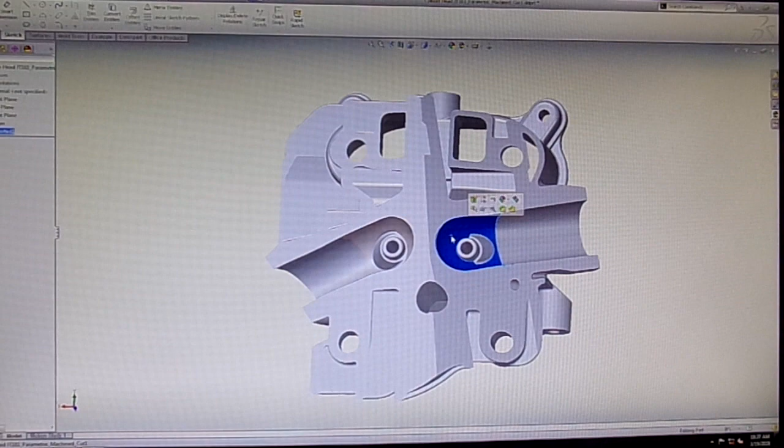So let me introduce you to some of the changes and benefits of the new PS1 head. First, I'd like to show you the new port design. If you notice in this area and in this area, the infamous bowls are gone. Many drivers and engine builders were filling those bowls with epoxy or metal impregnated epoxy to get better flow out of the head, meeting with quite a bit of success on the intake side, but not on the exhaust side because of the high temperatures just blowing that epoxy out. These are now cast in a way that the bowls are gone.

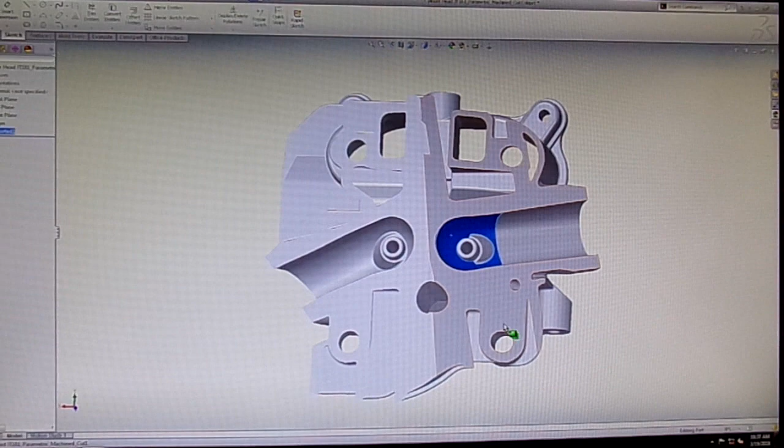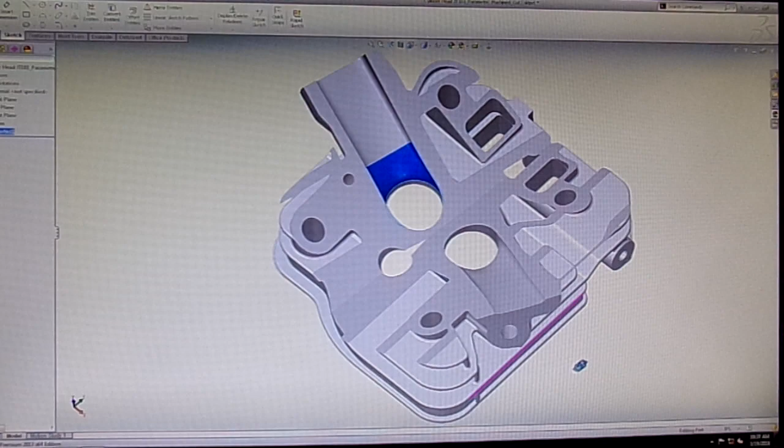This is a section view of the cylinder head. This matching section view shows the short side radius, and you can see we've changed that radius considerably in that area and in this area, for both the intake and the exhaust. What that's going to do is help the flow quite a bit. The radius has been increased to a point where the intake mixture will no longer separate from the wall as it turns that corner. The end result is at least a 30% increase in flow.

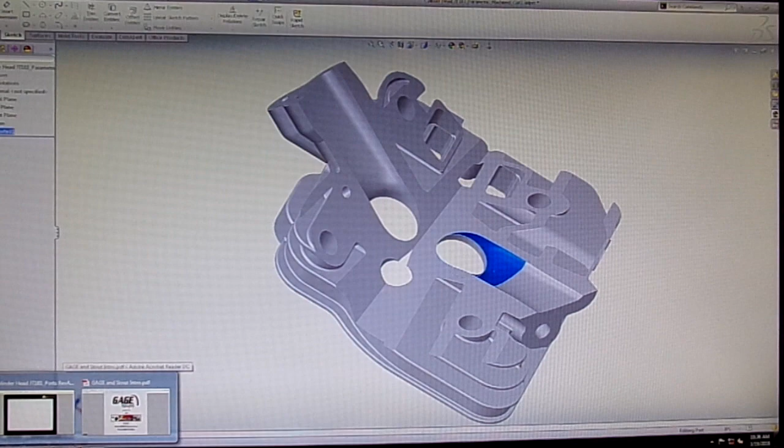I can also show you what those ports look like if you're just looking at the two ports. See the nice smooth radii around this bend, even around this short side here.

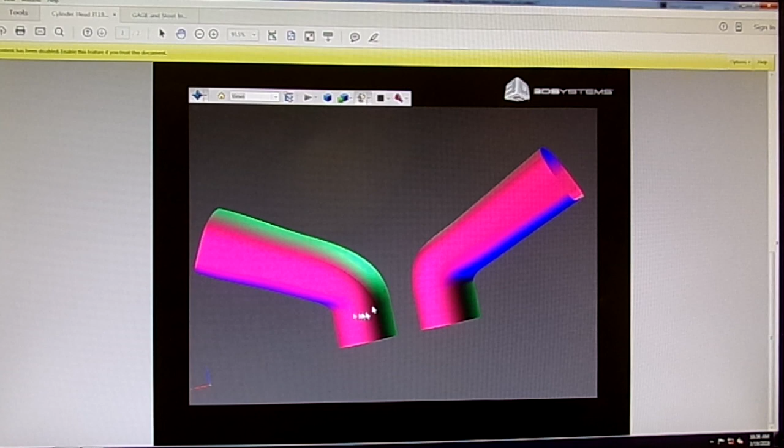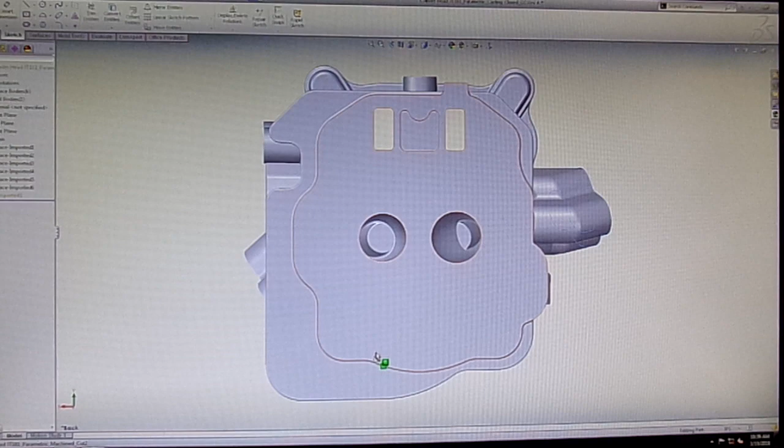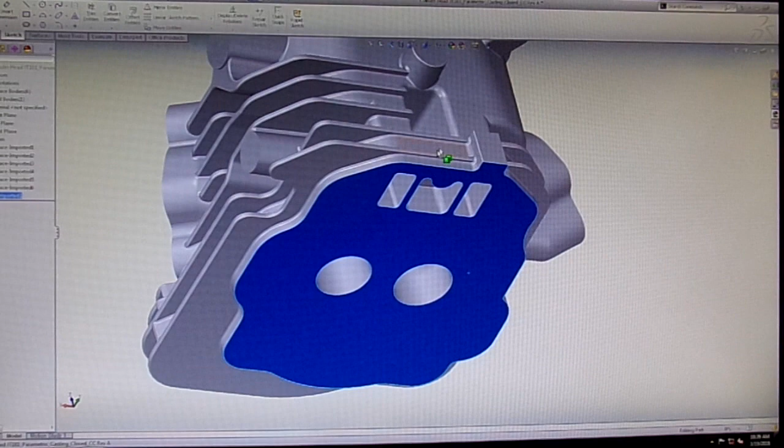Now, as we go into the casting model, there's a number of things we've done to change certain dimensions and supports. The first thing we've done is between the first and second fin, we've added material in this area, all these surfaces, we've actually made them match that surface. This surface has been copied and put between the first and second fin.

We've done that for a couple of reasons. One was to stiffen the head, because many drivers and engine builders were finding the heads warping once the gasket surface has been machined or decked, as some people put it, to get a smaller combustion chamber and increase the compression ratio. But once they mill that material off, the heads had a tendency of warping, and when they do that, they blow head gaskets.

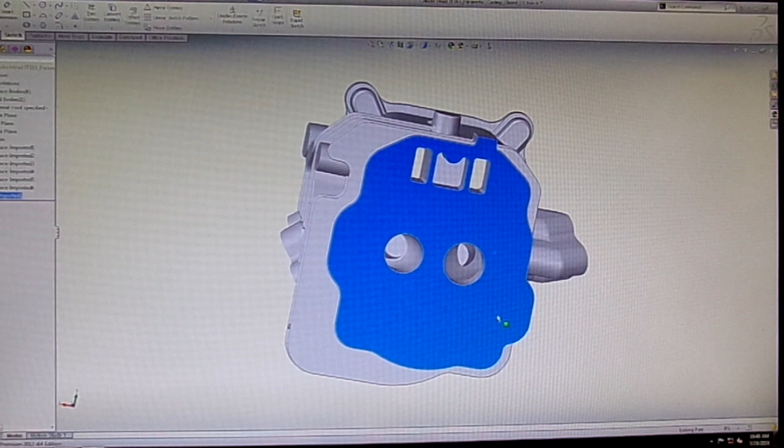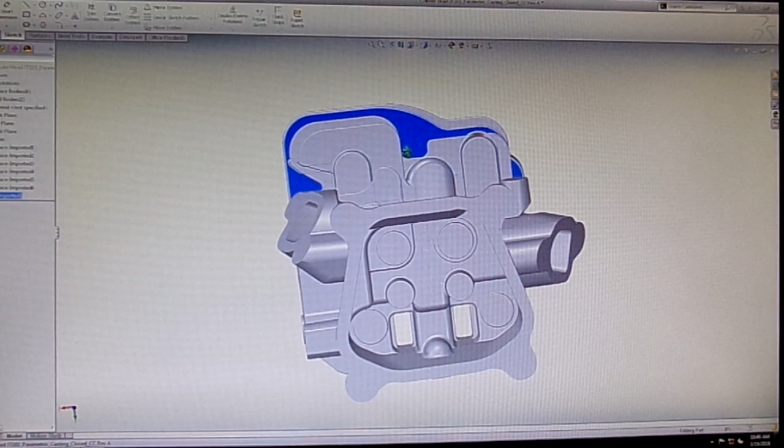Another thing we've done is added some material in this area. The reason we did that is so that right here, you'll see a notch cut in this fin. That notch was there so that if you decide you want to put another head bolt in, you can actually machine a hole through here, through to the other side, transfer that hole into your cylinder, tap that hole, and put another head bolt in. The head bolt might be a little smaller than your other 4 head bolts, but it won't take much to create a better seal to keep from blowing a head gasket in this area.

You'll also notice there's no combustion chamber cast into this head. The reason we did that is because we're going to CNC the combustion chambers, whether they be 22, 18, 14, or any custom shape an engine builder might want. For the pure stock class, we're going to CNC the combustion chamber and CNC both ports to stock dimensions. That will be the only class that we CNC the ports for.

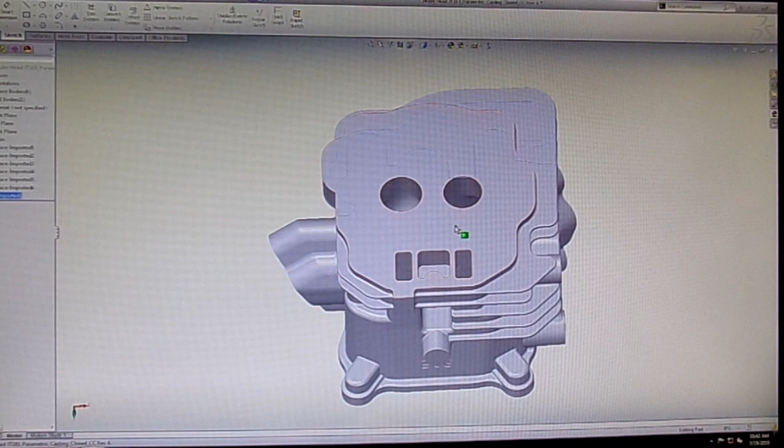Engine builders can buy this head in various configurations, but none of them will have CNC ports because engine builders have their own little secrets for porting, and we want to make sure their customers have access to their magic. Every engine builder has their own preferences.

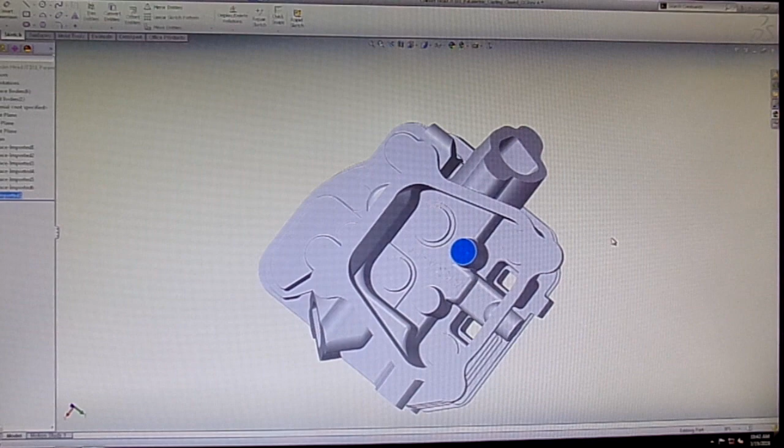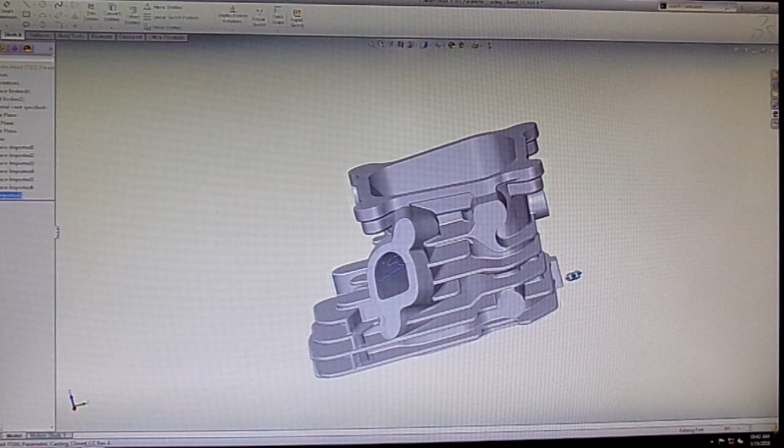Another thing you're going to see is this area here is now completely filled in. We did that for a couple of reasons: one, to add support to the boss for the trunnion screw that mounts in here, and the other reason was because we wanted to add material to the outside of the port. We've done that to both ports. So if you look at these surfaces down in here, we've added 40 thousandths to the outside of the ports, allowing porting to be much larger, or at the very least you'll be able to change the direction or shape of the port in a way that you can get it to flow much better.

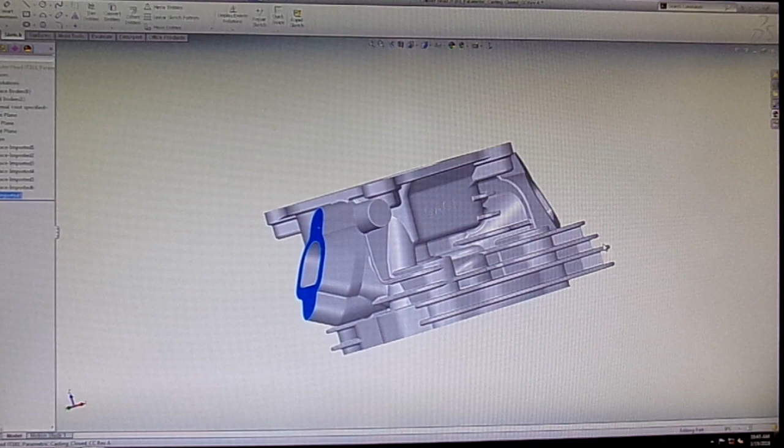Another thing we did was to this gasket surface on both the intake and exhaust, we've added material to the length here. We've made this section longer, so this surface sticks out another quarter of an inch on each side. We did that so engine builders can change the angle of the carburetor mount or exhaust mount, to get a better approach on both the carburetor side and the exhaust side.

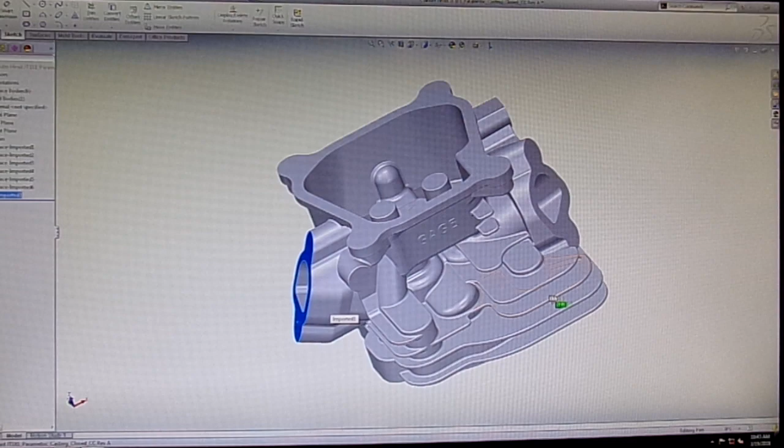For the pure stock class, the reason we're CNCing these heads and the ports is so that every head is identical. No one will have an advantage or disadvantage, and that's one of the problems in all the stock classes.

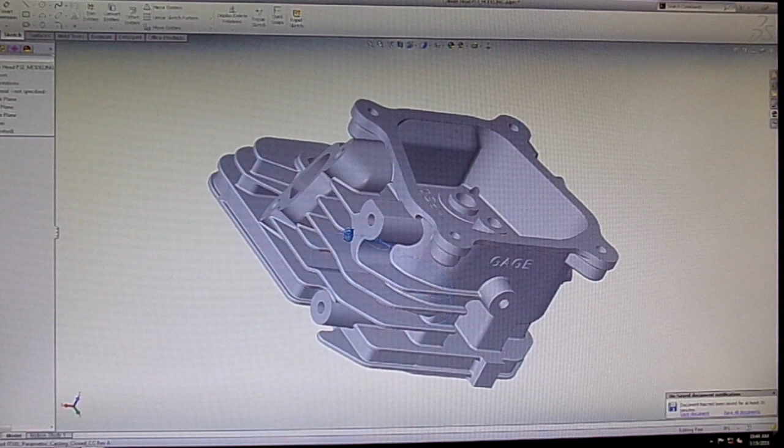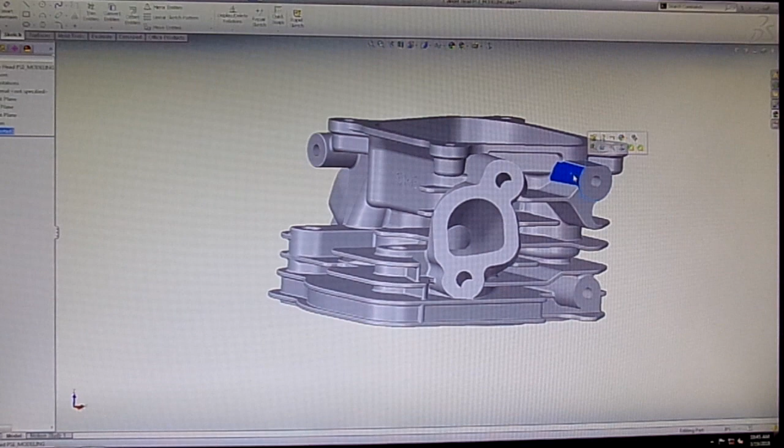Another thing that we did was with this boss here that people use to mount their exhaust pipe bracket. Many people were breaking that boss off, so we increased the outside diameter of that surface to give it more strength. We've also added all this material in here to support it, where previously there was just a very thin fin, the same thickness as this fin, supporting it. Now you have all this material to support that.

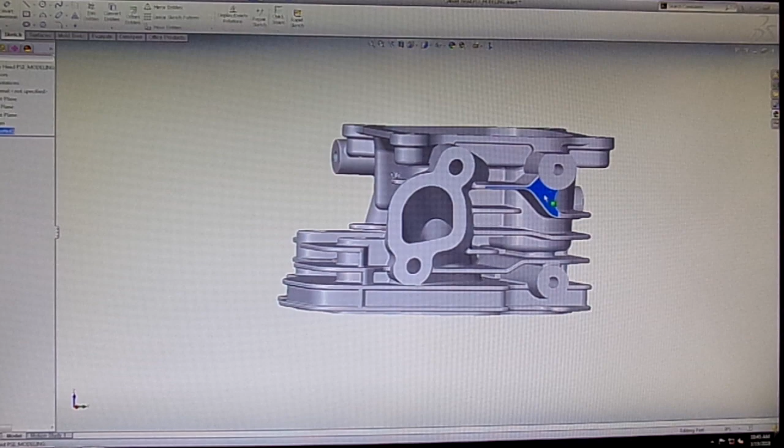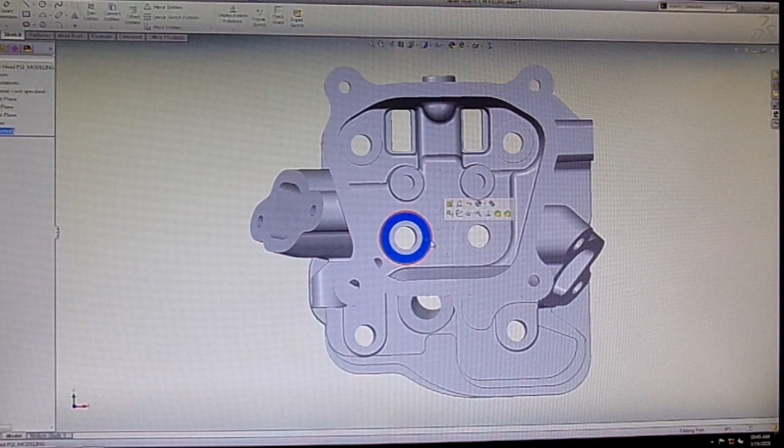Another place we've added material is this bottom surface, which is the cavity where your springs and rockers are. There are two areas here—if you're using heavier springs or dual springs, you need to spot face that surface deeper to get the correct spring heights, and many people were breaking through this bottom wall before they got to the right spring heights.

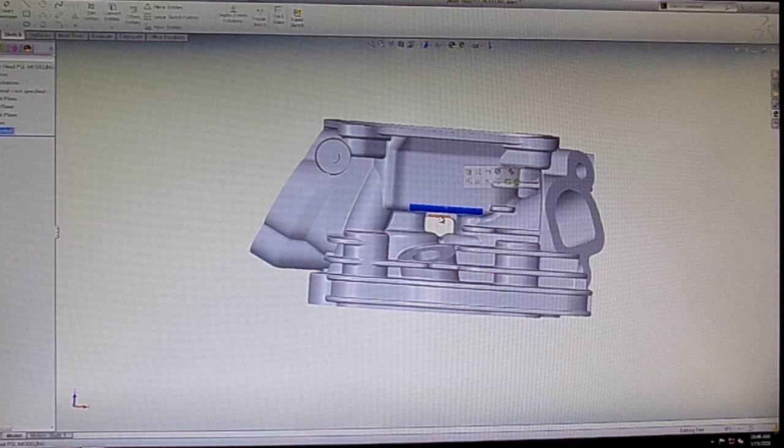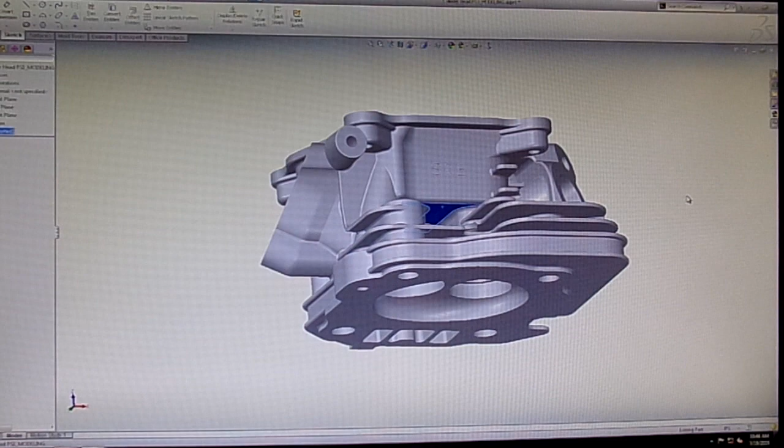We've added an eighth of an inch of material here. The old cylinder heads ended somewhere around this blue line, and we've added material so you can spot face these two surfaces without worrying about breaking through, or getting so thin that you get vibration in the casting. That vibration can transfer harmonically to the springs, and at certain RPMs you can get spring breakage or complete failure, ending up floating your valves or rockers. So we've added that material to those spring pockets.

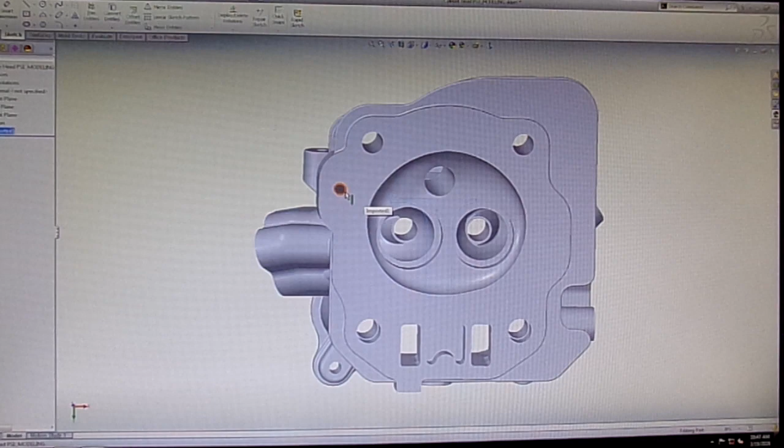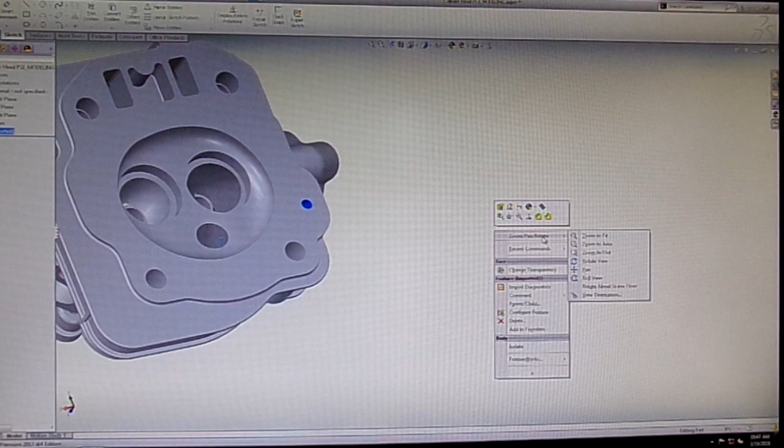We've also done something with this little hole here that goes through the head and comes out right here. We've changed that—let me rotate this around. We've changed the diameter of that hole, and we've also moved it.

This was a much larger hole previously. People were driving a brass tube into that larger hole to increase the distance between the combustion chamber and the edge of that hole, because people were blowing head gaskets right in that area. So we took a smaller diameter hole and moved it over to the edge of where the old hole used to be. By moving it over, we've increased that distance even more, helping the head gasket blowing issue.

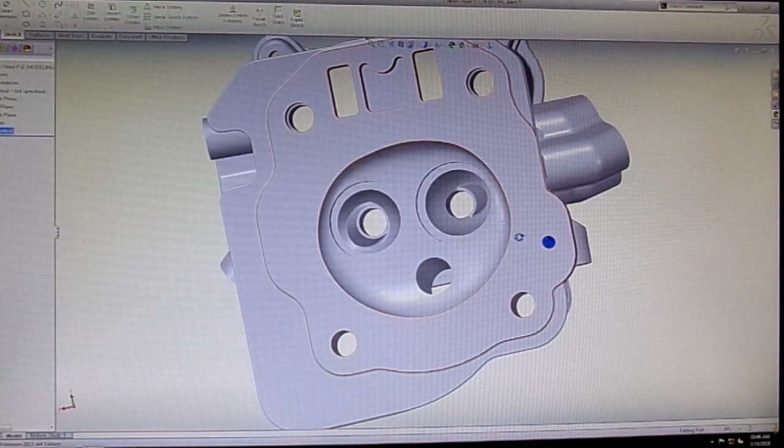It's also been slightly redirected so that when it comes out here, there's a better mist hitting your rockers and springs, trying to keep them cool.

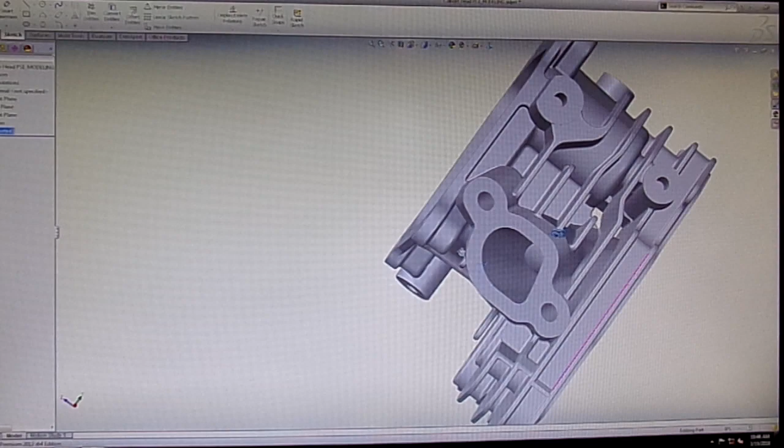There are also additional improvements we've made that we can't talk about yet because they can't be used yet, but over the next few months you're going to hear about and see some of the other improvements we've made to this cylinder head.